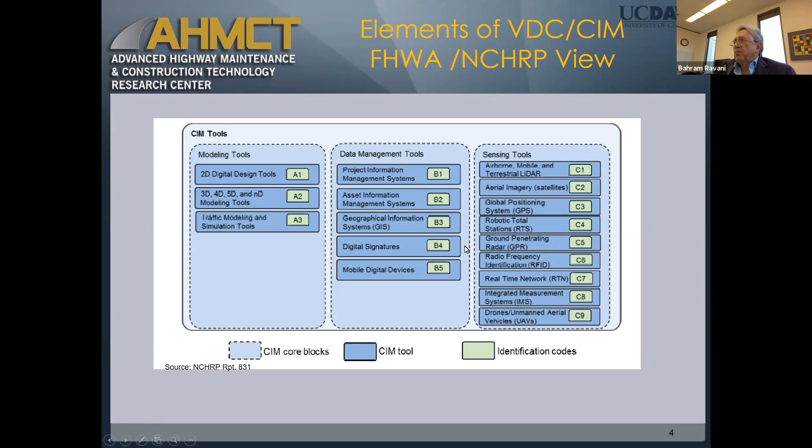The pandemic has pushed these things. Digital transformation has become much more prevalent due to the unfortunate pandemic of COVID-19. And we can see it in terms of having this meeting, that we are collaborating digitally by having a conference, but also in many aspects of life, and also in companies utilizing these tools more and more.

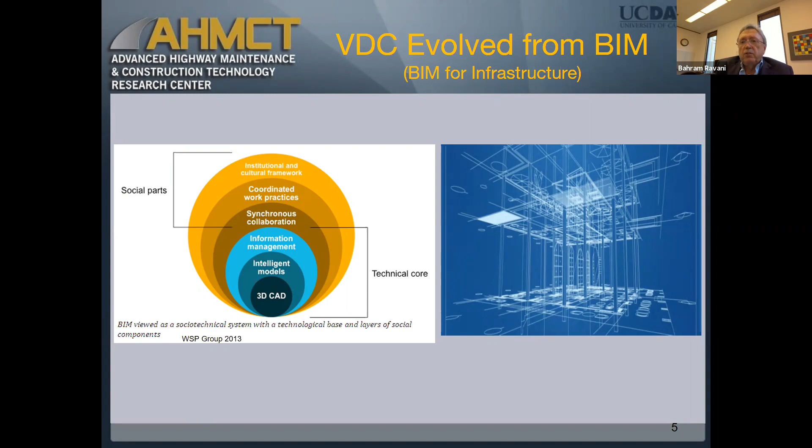CIM, of course, is digital transformation at the enterprise level, which impacts all of the operation, not only design and project delivery, but also other aspects of the operation within any company or organization. But let's take a few minutes and look at how the trends in digitization, visualization, and modeling capabilities have evolved over the years.

If you look at the early days, we had computer mapping and manual drafting, some level of GIS maybe, perspectives, and then GIS and 3D came later on. Then GPS became commercialized. Public use of it came toward the end of the 80s. And that created a lot of opportunities. Then desktop mapping became available. Then network mapping and wireless technology became available in the 2000s.

And then, of course, Google introduced the KML viewer and Google Earth. Then BIM started to evolve and be developed. And as we get beyond 2010, BIM for infrastructure is getting developed. And I think the future is digital twin technology. Already some companies are trying to use digital twins for applications in manufacturing and other places. And I think for infrastructure, digital twins are becoming a reality currently and also into the next few years.

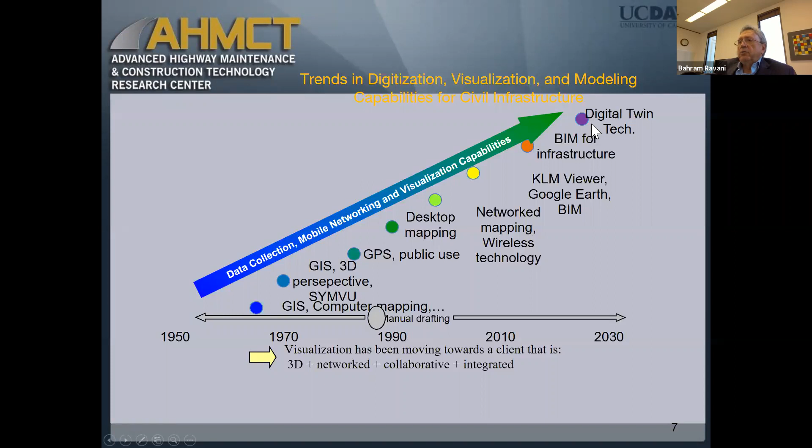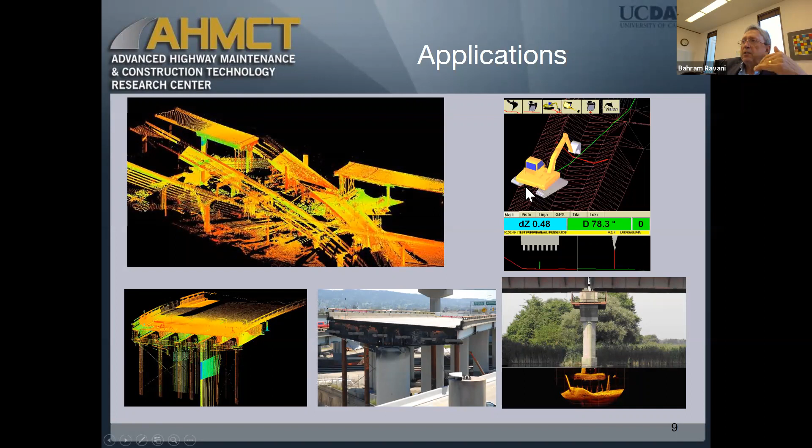And then, of course, for underground things, we have used ground penetrating radar. These are the piers that are going to be put into water. And you can see on the right-hand side a digital view of what is underground from our ground penetrating radar. And all of these things can also be used for construction, and I'm sure you guys are familiar with it. You can use laser scans for machine guidance to guide operations for grading and things like that.

Another project we did was a bridge called Antler Bridge. And here we used digital transformation in a different way. There were contractors constructing the bridge, and to perform the inspection operation, we had our laser scanner set up, and the laser would scan every day. So the scan would show the progress, and we would match it with the schedule.

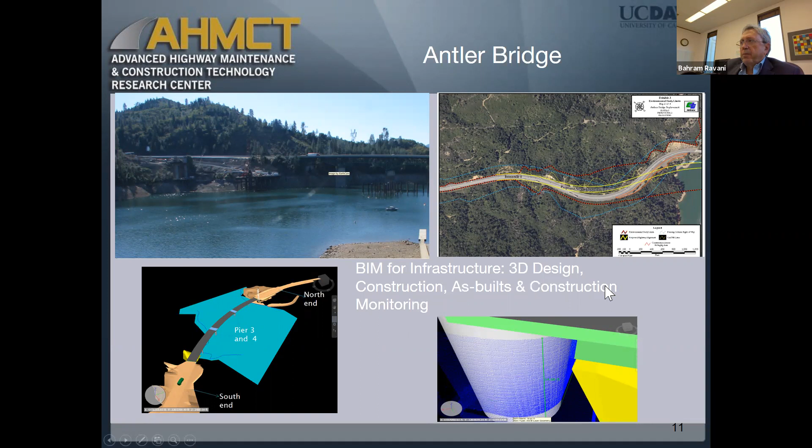So now that you got some examples of things that were done, let's look at the elements of digital transformation for horizontal construction, or elements of VDC and CIM.

So we have information models that include: you need to have a common data exchange environment and information standards, and there are some things that can help us, ISO, and then you can use, in some cases, XML, etc. But ISO provides a lot of data. Nowadays, they're very well advanced in terms of providing a lot of standards. You want to do a data dictionary, and then some templates for the information model, and then some templates for electronic data and document management. And also, you have to standardize the information exchange.

For the teams, you have to make sure you define the roles and responsibilities, methods of communication, how you synchronize collaboration, and then coordinate work practices, and then manage the stakeholders. At the enterprise, you have to develop governance methods. So you have to make sure that you impact the institutional and cultural framework, put policies and guidelines and the standards for adoption, address legal and liability issues, and develop conventions.

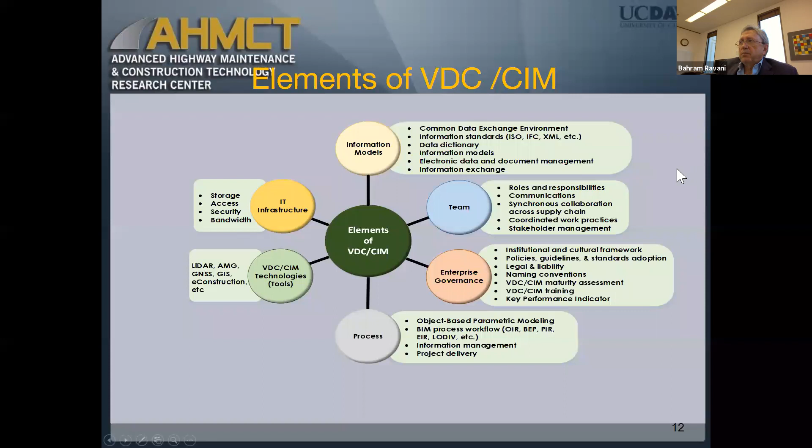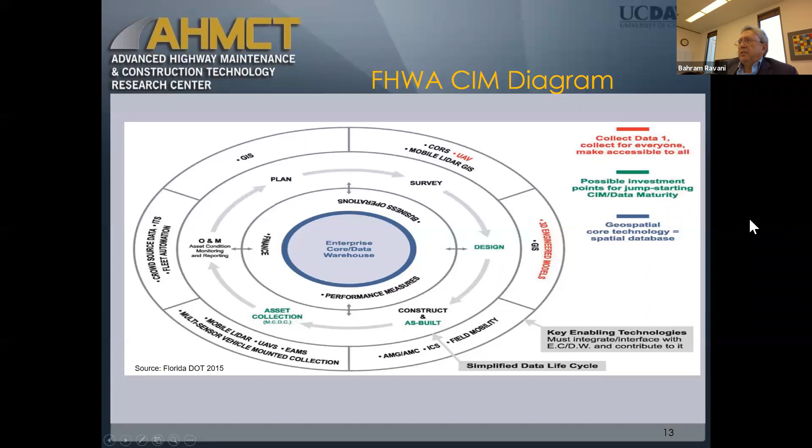This is the CIM diagram by FHWA that has at the core the enterprise or core data warehouse, and at the outset it has GIS, use of drones, LiDAR, 3D engineering models, and so forth. And then the middle layers have finance, business operation, asset management, asset collection, as-built plans, design, survey, planning. We modified this. For our purposes, we made this into a larger thing. Still, data and document management is at the core.

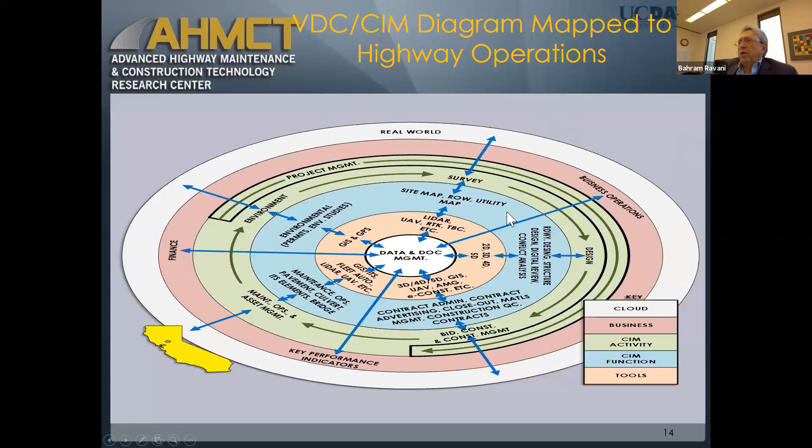And then, of course, dealing with your data, you want to use GIS, LiDAR, UAVs, 2- and 3-dimensional, 5-dimensional modeling, and so forth. So we modified the FHWA diagram. I think that this is more representative.

So the key points to keep in mind for the workflow in transformation of horizontal construction: you want to make sure that documents and data are at the center. CIM tools are on the inner ring. CIM activities are on the green ring. Here you can see the green ring. Then project management is on the blue ring. And then asset management uses data from many of the activities. So asset management is something that cuts across and takes things from various activities.

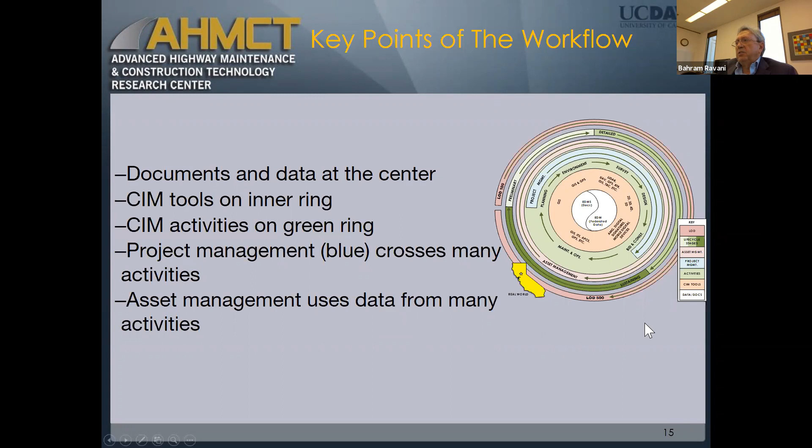When you look at digital transformation, one of the questions an organization always has is: what is the ROI, the return on investment? And when we were trying to do this, we said, okay, let's look at ROI in BIM, because a lot of data is available for BIM. Less data is available for infrastructure, for highways or horizontal construction, but for buildings, there is a lot of data. So let's start there.

So there are publications that did surveys in different countries of people who have used BIM, and you can see what the data shows. For example, in the United States, about 75% of contractors who built vertical structures said that BIM would have tremendous benefit for them, that it has positive ROI. In Japan, close to 95%. In Germany, close to 95%. In France, close to 95%. Canada, more than 80%. Brazil, more than 80%. United Kingdom, about 60%. South Korea, about 50%. So this gives us an idea that BIM, and digital transformation in general, does have benefit. If it has benefit in vertical construction, it has to have return on investment for horizontal.

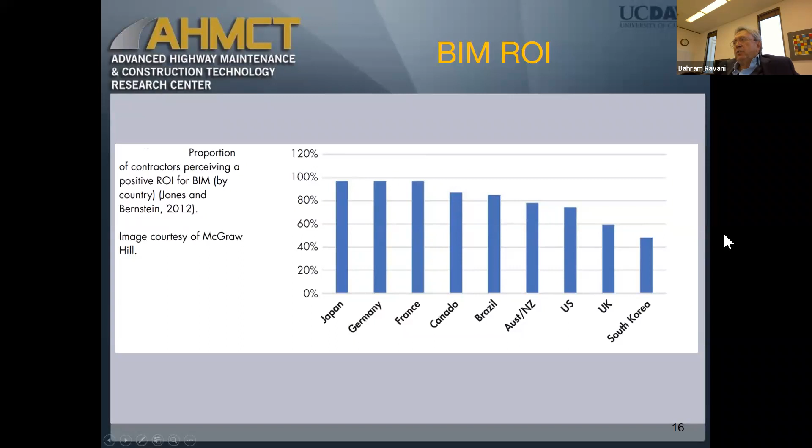There are other ways to look at it too, from a theoretical point of view. There's this diagram that has become popular called MacLeamy's curve, which shows that when you do traditional construction, shown with the red curve here for design change, a lot of the design changes occur at the time that you have generated your construction documents, or just before that. So therefore, there is a lot of cost associated with it.

When you use BIM or CIM, because you're dealing with a virtual model, many of your design changes, not all of them, but many of them, are handled at the time that you are dealing with this digital model. So the cost for design change is low. You can see the curve here, that the ability to change decreases as you get toward construction. So if you can do your design changes here, that is going to give you savings in cost. So this is a theoretical curve that shows you that there is an ROI, or return on investment, when you use digital technology.

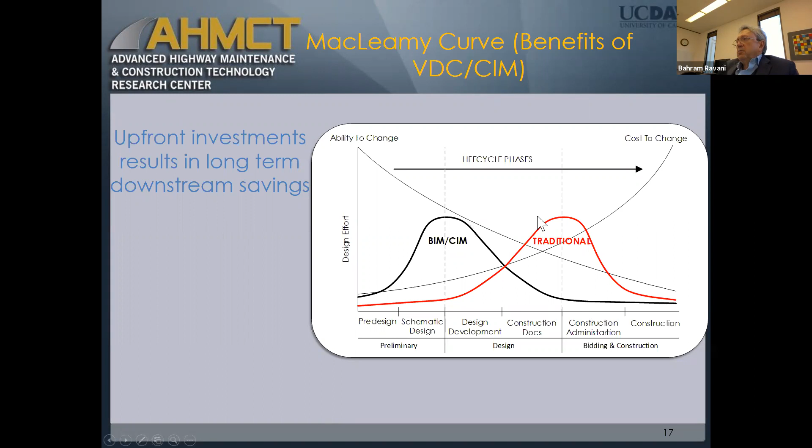This is another thing, data that can be used. NIST, which is the National Institute of Standards and Technology, has done a study in manufacturing, and they have estimated the cost of interoperability. Interoperability comes when you have digital models. And when we apply that to

the life cycle of design for horizontal construction, you can see that, for example, when you do preliminary design, the red line is the traditional and the black line is for BIM or CIM, that every time you do a change, you're going to cause some loss of information, and then as a result, an increase in cost inverse to that. But when you have a digital model, there's never a loss of information. So the information value increases, and as the information value increases, there's less chance of design changes, and therefore you would have a higher ROI.

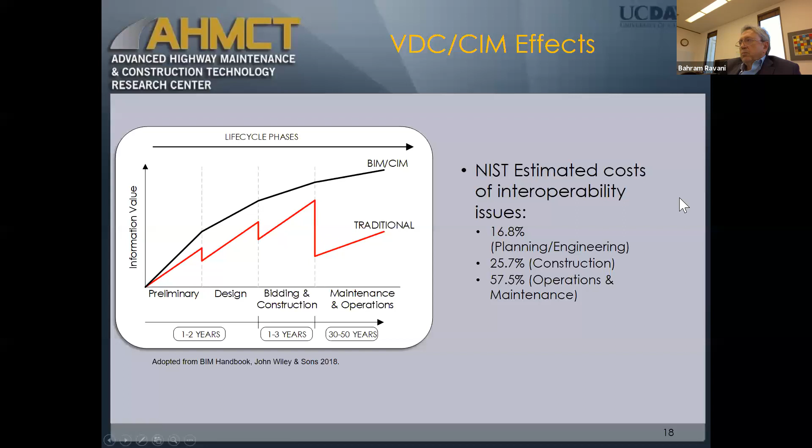So now let's look at more details. You have contractors, there's a process of bidding and construction, there's a process of design, you have to survey, you have to consider environment, project planners, you have to later perform maintenance operation and asset management, and of course you have to do construction. So we feel that data has to be common. The common data should be used in all of these aspects. And if you have done all of your construction based on a digital model and digital transformation, then you can achieve this. You can have common data that can access all of these things.

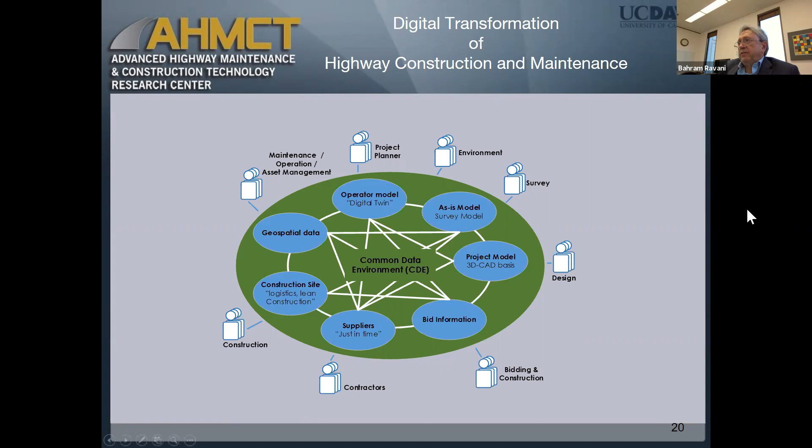And then of course, every organization has legacy systems. You have systems that you have already invested money in. So there's a question of how can I develop my data infrastructure so that I would be able to include my legacy systems. There are different ways, and the way that we recommend is to use a federated data structure. That's what I recommend, because with a federated data structure, you can include all of your legacy systems and still utilize them.

Now, one of the things we did here for Caltrans: you can have contractors and others who get a contract and do a digital scan or digital survey of a section of a roadway. And Caltrans, for California highways, has these post-mile markers and so forth. So we developed, in our center called AHMCT, the Advanced Highway Maintenance and Construction Technology Center, a software package called LiDAR Crawl, meaning using LiDAR or a laser scanner, we can crawl the highways.

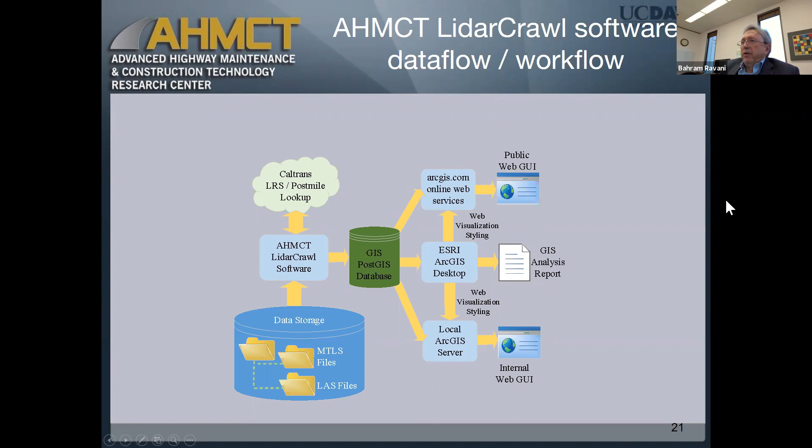We put that into a database, which is connected to a GIS system, and our LiDAR Crawl is synchronized with the post-mile markers. So then we can connect to different web services, Esri, desktop, any local server, through a GUI, through an internal web, because some organizations and contractors use an internal web. We can generate GIS analysis reports, and through a GUI also connect to a public-facing website. So even the public can go in and see the status of a project and things like that.

Now, if you have an organization, the question is, what would be the best methodology to try to perform digital transformation of my organization? So we developed a methodology, we're trying to publish a paper on it. This methodology consists of at least 5 steps.

The first step, if you're interested to transform your organization, so if you're a contractor or if you are a transportation agency, is to establish the baseline state of digital tools and technologies within your organization. And how can you do that? You can do that through developing a survey, and I can show you what we did, for example, for one organization.

Then you need to develop a method to measure or quantify the effect of incremental change. Don't try at the beginning to do a complete transformation. It may be very costly and it may take a long time. So you have to look at incremental change first and be able to quantify the effect of it. Because if you cannot quantify it, you cannot get your management to give you the resources and the funding needed to do the next step.

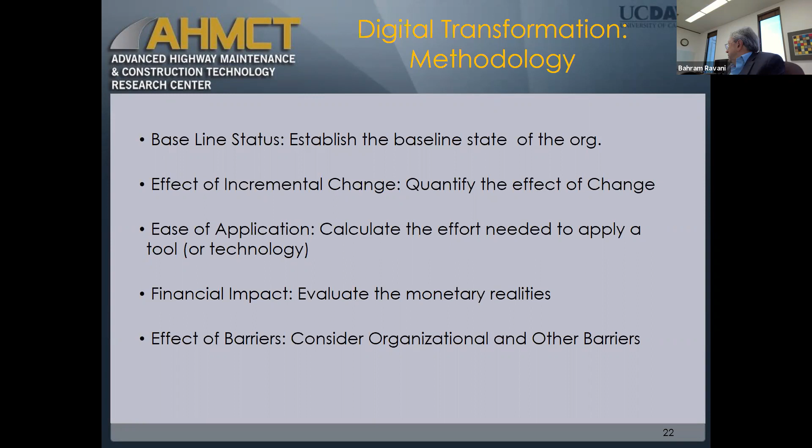And then last but not the least, you need to look at other barriers. There might be organizational or legal barriers or other barriers. You need to look at them. And now I want to look at each of these things and tell you more detail of how we can do each of these. I think I'm running out of time maybe.

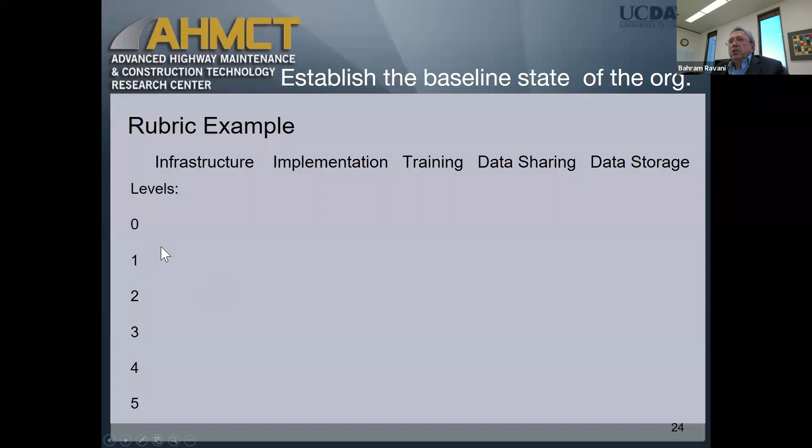So when you develop a baseline, a survey, you develop a rubric. In the rubric, you would describe 6 levels in terms of infrastructure. So if you want to take a tool and implement it, see if you have the infrastructure. If you don't have it, you put 0. If you have it fully integrated, you put 5. Training, is training available? Data sharing available? Method of data storage available? Then you can have people rank them. And this is examples of ranking. Let's just go faster through these things.

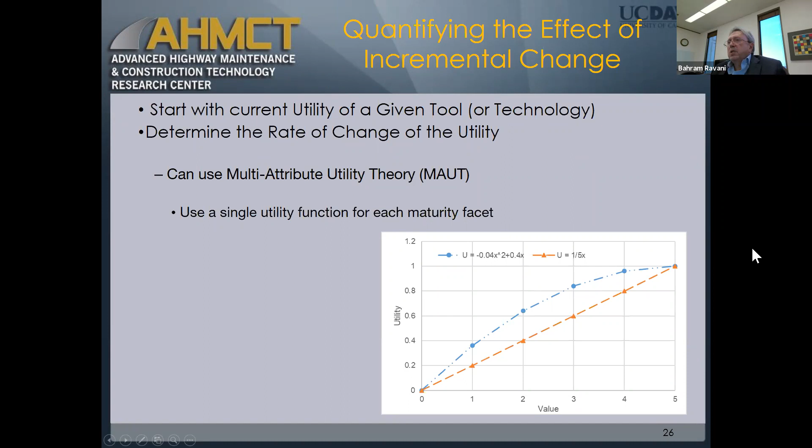Then to quantify the effect of incremental change, there are tools like multi-attribute utility theory. So you can use utility functions and so forth. I'm not going to go through details because I think I'm running out of time, and I want to have time for questions and answers.

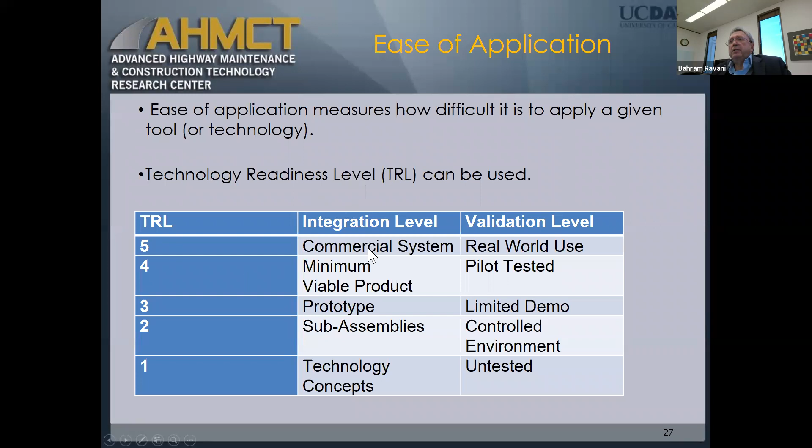And then for ease of application, we took advantage of technology readiness levels. These were developed by NASA, and have been used by NIST and others. So you can use them, and we have defined different levels for them for horizontal construction. And then, of course, you have to evaluate monetary values, budget priorities. You can then consider the ROI.

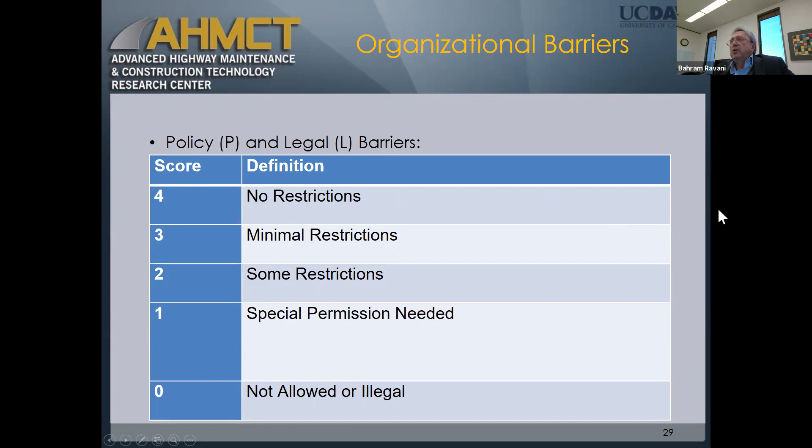And then for organizational barriers, we consider both policy and legal. And then you can do something like the TRL, technology readiness level. We developed levels: not allowed or illegal, requires a special permission, some restriction, minimal restriction, no restriction. So that way you can score them, and decide what are the low-hanging fruits so you can implement.

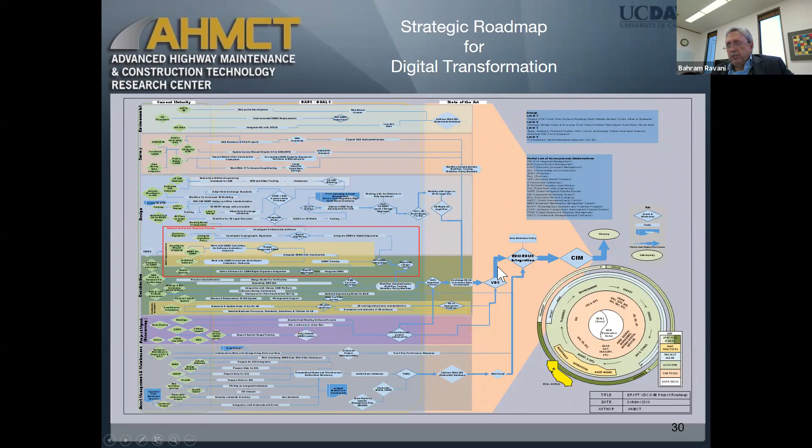Let me go back. So for Caltrans, we developed a roadmap that you can see here. You cannot read it, it's very involved. But I want to take a few minutes to talk about other impacts of digital transformation. If you can digitally transform your horizontal construction, you can also impact the future of mobility, because you can then use the data for digital mapping that would impact autonomous driving that is becoming more popular.

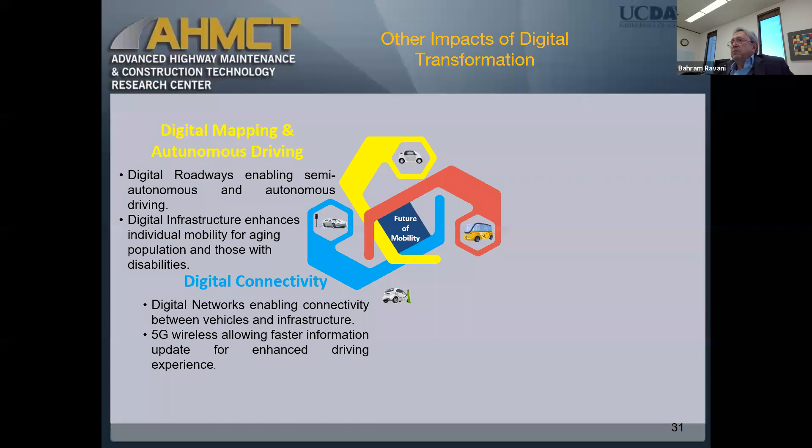You can add digital connectivity, digital networks, so you can do updates of roadways and traffic, so you can enhance driving experiences. You can also impact increased diversity in mobility, because then you can have demand usage for transportation units, enable innovation in on-demand mobility systems, and increase the use of transit as compared to individual vehicles, because you have digital data related to your highway infrastructure.

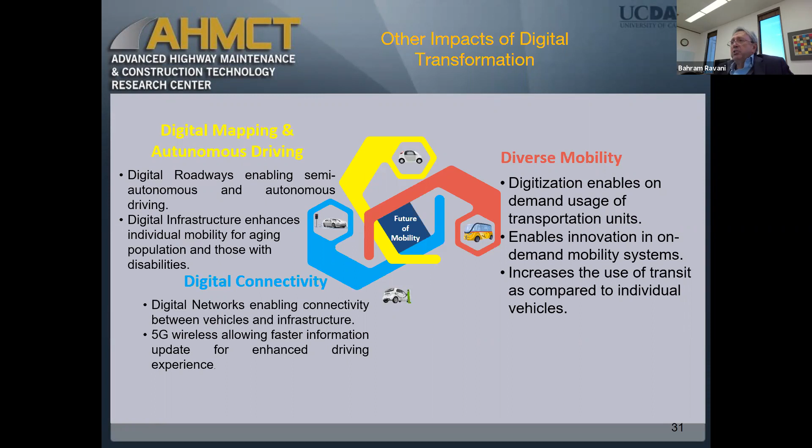We did an example. We developed autonomous snow blowers to open some roads in the Yosemite area, which get about 50 feet of snow in the winter, and so forth.

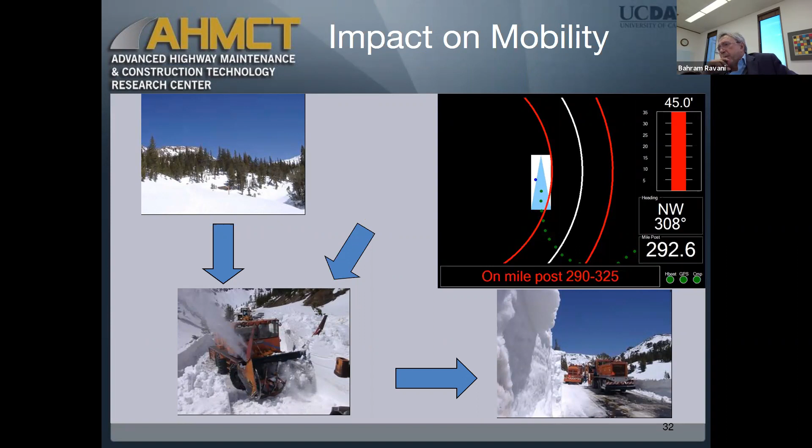We have also some publications for those of you who are interested in technical aspects related to some of these, and we're trying to make other ones. But I want to also spend maybe 2 minutes on the future.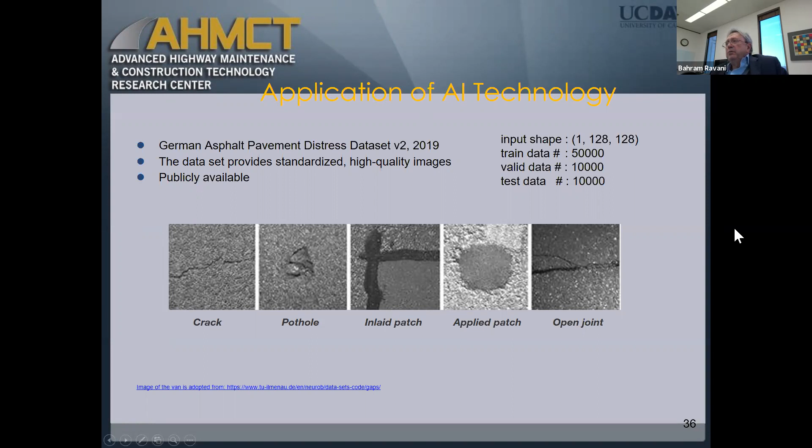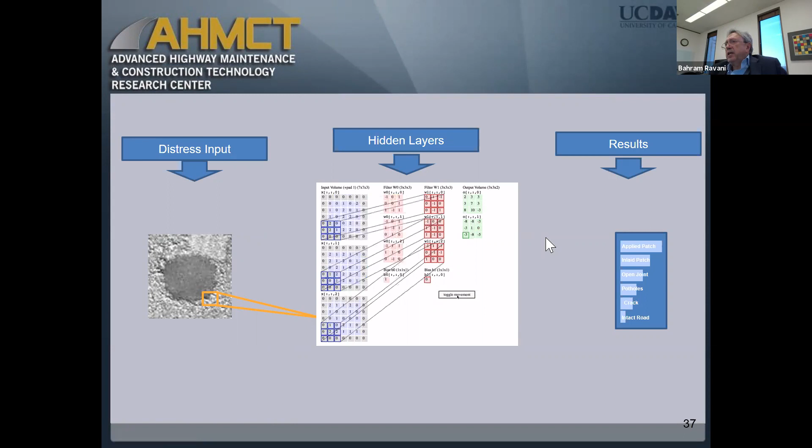I was just showing you, for example, you can use CNN, convolutional neural networks, different layers of, and we have done that on some applications for pothole filling and things like that. In your contracting, you can also try to take advantage of blockchain technology. And blockchain technology can have other applications too. So, you can think about using blockchain technology.

With that, I'd like to stop and see, oh, I was going to show you, maybe I can show you, digital enhanced mobility in use of autonomous driving, also in use of drones for various applications. Oops. I think I have a video here to show. Oh. Maybe not. Maybe the video is not loading. I was just going to show you use of drone for bridge inspection. Using laser scan, using point cloud data, we have developed a technique that you can use drones for bridge inspections.

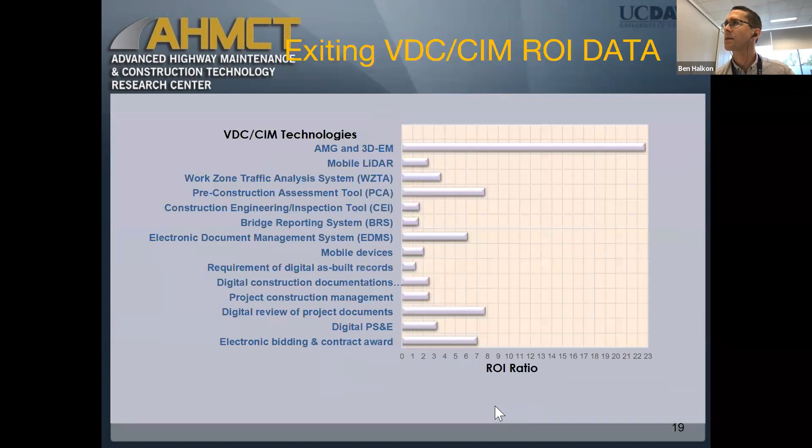Yeah, thank you. Can you please maybe just go back to the slide where you were showing in the early part of your presentation the GPS and the dead reckoning system you had on the vehicle? You were doing bridge measurements. I was just interested how the GPS worked. I think you may have answered the question. When you go into the bridge, obviously you've got no GPS signal, but I guess that's where you then let the dead reckoning take over temporarily until you emerge from the other side of the bridge here.

Yeah, so we have a dead reckoning. We have an IMU, inertial measurement unit, that has a dead reckoning system in it. So when you're under, that takes over. Yeah, thank you. That's great. The other thing is, you have bridges that are longer. You can put these pseudolites, and they can send signals like the GPS satellite signals.

How good is the GPS actually in terms of the positioning accuracy these days? Is it better when you're traveling versus when you're stationary? Because we have managed with mobile laser scanning, we can get it to be highly accurate to within centimeters. And in the context of tunnel geometry, that's good enough uncertainty level, centimeters. And of course, if you need to have millimeter accuracy, then you can use multiple laser scans and so forth and improve the accuracy.

Yeah, cool. But we have also developed techniques for putting control points and control lines, which are survey points, survey lines. And then the question is, based on the accuracy requirement, we have a chart that would enable you to know for what accuracy, how many survey points you need. So the spacing of the survey points or survey lines would determine the accuracy. So we have developed data on that.

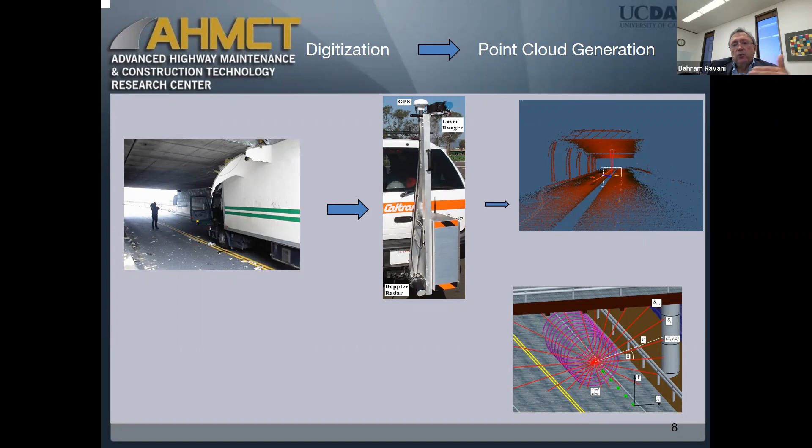We also put some sensors on some highway barriers, and we had a remote way of monitoring when there was some impact to them. Because sometimes some impacts were nuisance impacts, meaning a small impact, and the cars would go, but then we had to go and retract them because they were retractable. If Caltrans, or the Department of Transportation, didn't know it, they wouldn't know to go and retract it. So we put sensors on them, and through wireless networks we would be able to detect it.